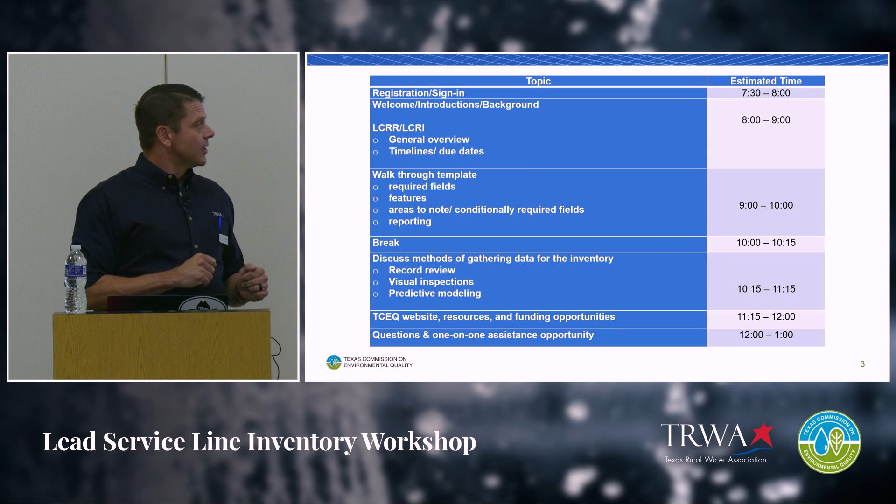Today this is the pretty loose agenda, but we should be going from about 8 to 12 o'clock. We're going to go over 4 sections: an overview of LCRR with a little bit of LCRI, the improvements. We're going to walk through the template, each section, to explain what is needed on each component or tab of that Excel sheet. We're going to go through the different methods of gathering this information, and then at the end, some resources and funding information. So we're going to break this up for different speakers.

Without any further hesitation, we'll have Elston Johnson go over the LCRR overview. Thank you, Jason. So I'm going to take some time to go through the actual overview of the rule requirements for the LCRR and mention a little bit of LCRI. We'll talk about that when we get to it. It hasn't been released yet.

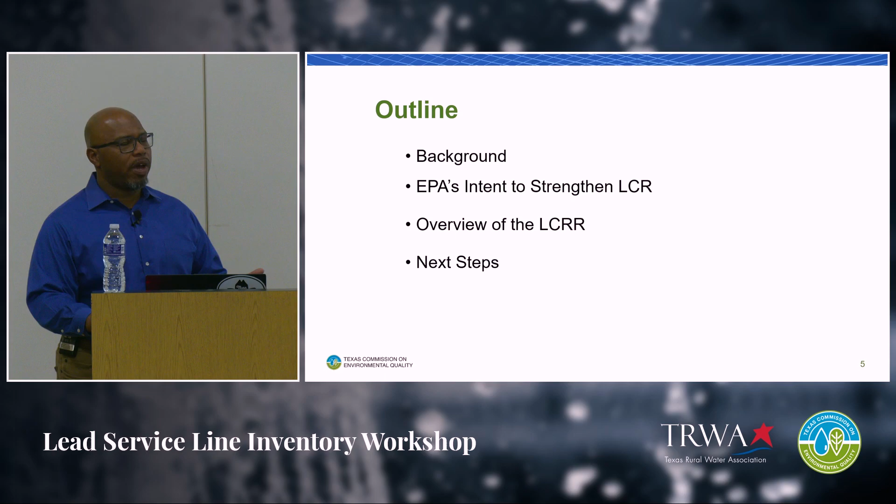What we want to do is give a little background about the lead and copper rule revisions, and then talk about EPA's intent to strengthen the current lead and copper rule, and then go through an overview and the next steps. Again, as Jason said, ask questions throughout. We want this to be very interactive. We want to make sure you get the information you need.

All right, so the lead and copper rule was originally published by EPA in 1991. And as we all know, health concerns with lead has been something that's been an issue for years. Human exposure to lead causes a number of health effects, most notably delayed development, mostly in infants and children, when it comes to mental capacity. There's also some health effects that can impact adults as well, things like cardiovascular impacts.

Because of the number of routes of exposure, I know a lot of people are familiar with exposure through paint as well as dust, but water has a significant exposure rate too, especially drinking water. Some studies put it at approximately 20% of lead exposure coming from drinking water in adults, and even higher for infants and younger children.

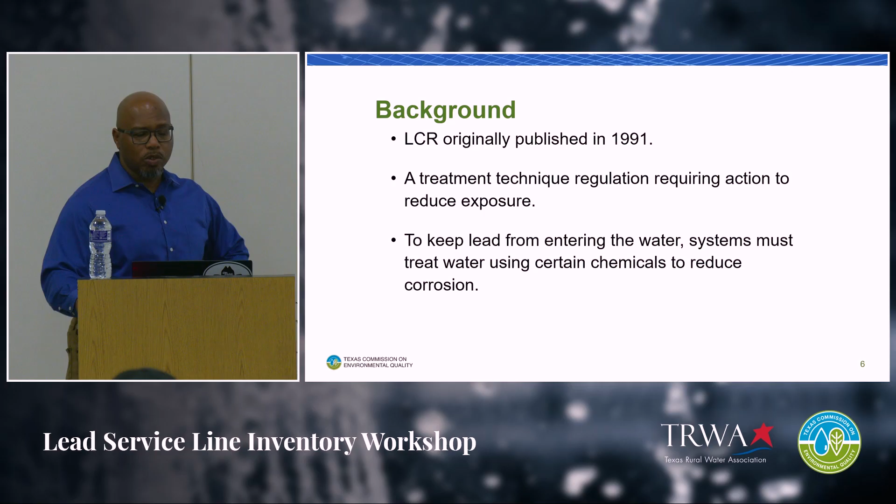So EPA put this rule out in 1991 to try to get those exposure rates down. It's a treatment technique-based regulation, which means once you hit a level, and the LCRR is an action level, there are activities you need to do to try to get that exposure down and get those lead levels down.

One of the most notable ways we do that currently, and still with the revision, is corrosion treatment—applying chemicals and treatment to slow down the rate of corrosion of lead out of pipes when it interacts with water.

To strengthen the LCR and the revisions, the goal is to proactively remove lead service lines and more equitably protect public health. In doing that, the Lead and Copper Rule Revisions are effective now.

They were put out in 2021. EPA is working on improvements, and those are currently under development. My understanding is it'll be released maybe summer or fall, with changes to make the current LCR even more protective. So we'll wait and see what comes up with those.

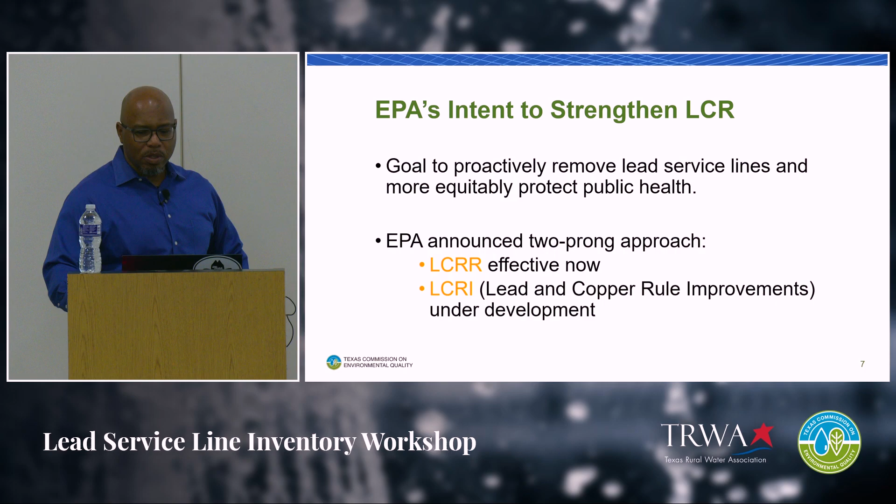So to strengthen the LCR, to better protect children and communities, there are three goals listed here for the rule.

Number one is to get the lead out and actively, effectively remove lead, which is the most effective way to address and prevent exposure to lead—literally getting rid of it. That's one of the goals here.

Second is to empower communities, providing more information and education on how to reduce their lead exposure. Then, better protect children—this adds a component of testing for lead specifically in schools, which hadn't been in place in the current rule, other than if the school itself was a water system.

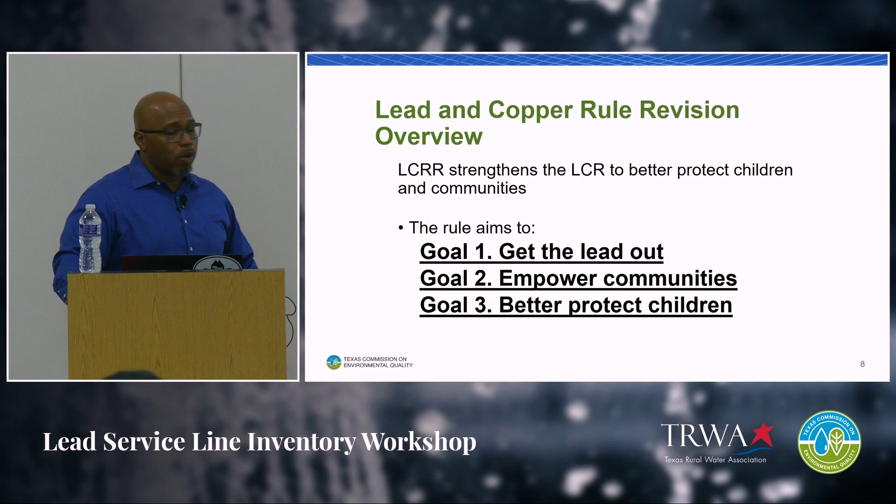So we'll walk through these goals here. Goal one: replacing more lead service lines.

The LCRR defines a lead service line as a portion of pipe made of lead which connects the water main to the building inlet—basically the line from the main to whatever structure is being served by the water system. It is typically owned by the water system on one side and the property owner on the other side, which makes things a little complicated, so we'll talk through that.

Also, galvanized service lines are considered lead service lines if they ever were or currently are downstream of a lead service line, or downstream of a service line of unknown material. So if you don't know what the service line is made of, you have to assume right off the bat that it could possibly be lead, and do more investigation.

We'll talk through that more as we walk through the inventory specifically. Now there's been a lot of discussion about the connectors—the goosenecks, the pigtails. They don't count as lead service lines in the final rule that was put out.

They are something to definitely pay attention to. As we walk through the inventory, you'll see that they need to be identified, and when they're found, they do need to be removed, but they do not count as a lead service line. Once they go through the specifics of the template and the inventory, they'll discuss that in more detail.

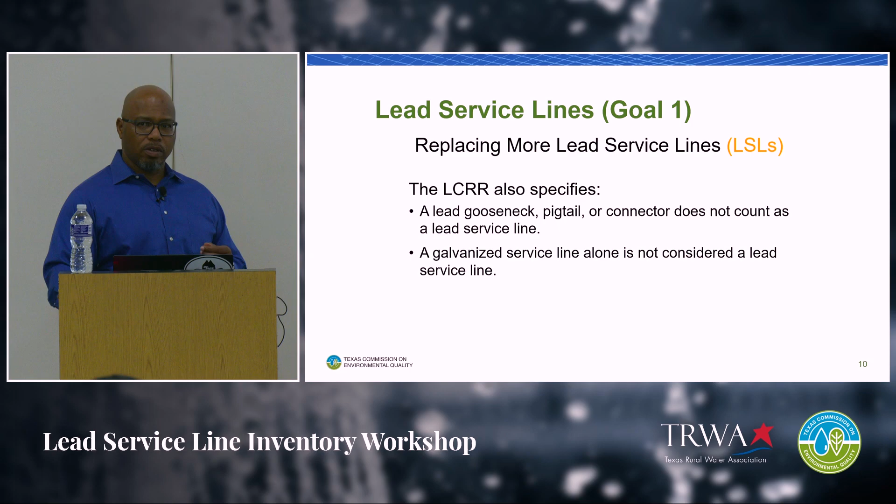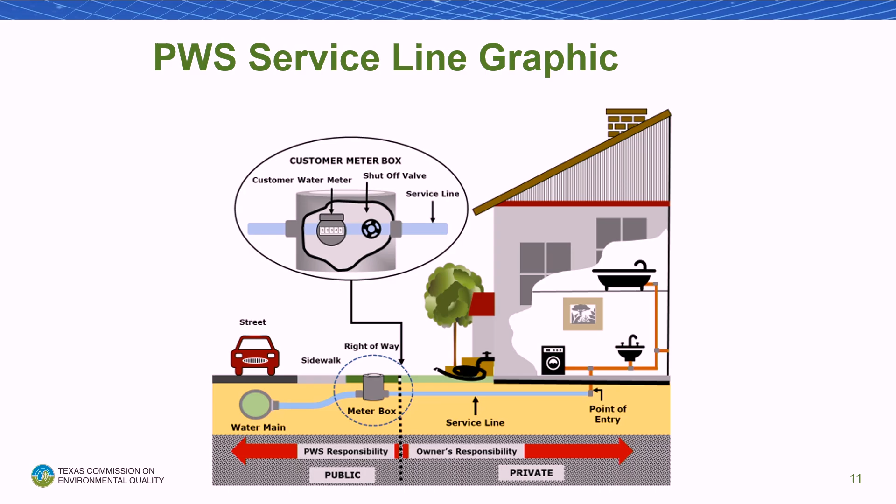Here's a graphic that describes a typical PWS service line. From the water main, you have up to the meter box, and then from the meter box at the property line, you go into the house—that's what's considered the service line. Below, it shows what's considered PWS responsibility, the public side, and the owner's responsibility, the private side. Again, when it comes to getting that replaced, that can make things a little complicated.

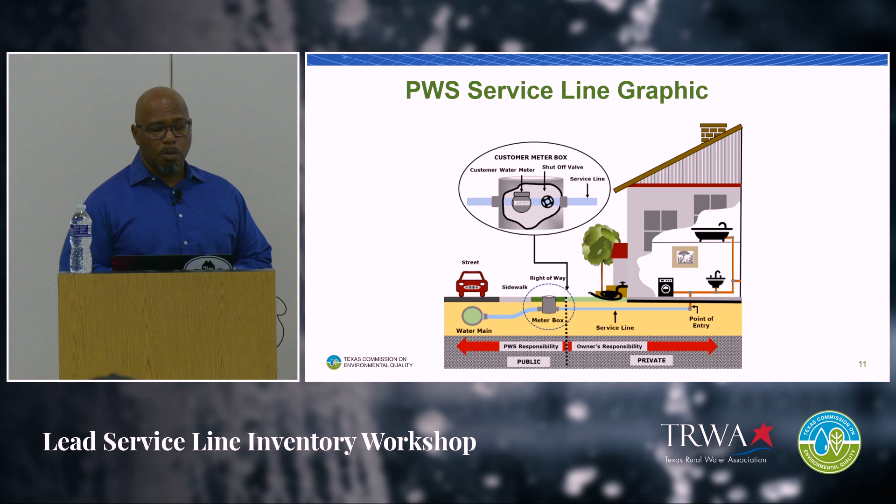Both parties have to work together to get that service line replaced when it is lead. So this graphic highlights when there's a gooseneck in place, or a connector from the corporation stop off the water main to the service line and into the house.

In this scenario, if that gooseneck is lead and the service line is PVC, then this is not considered a lead service line. So that's why the green check marks are there.

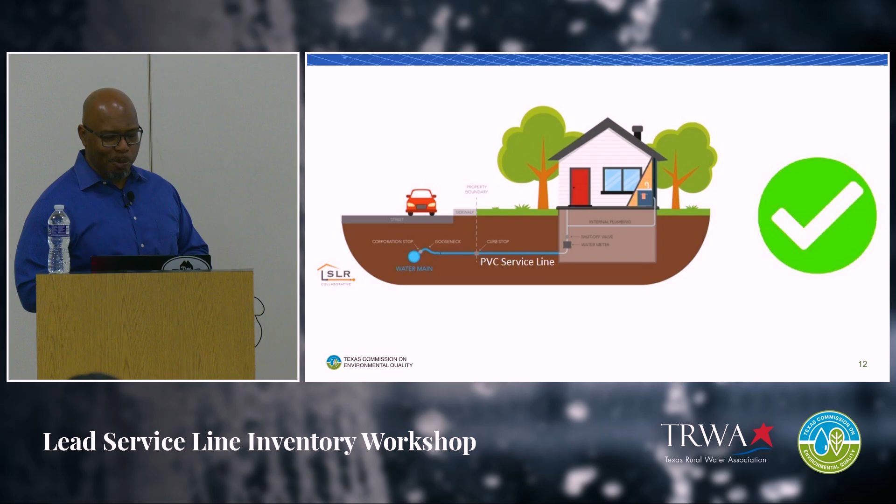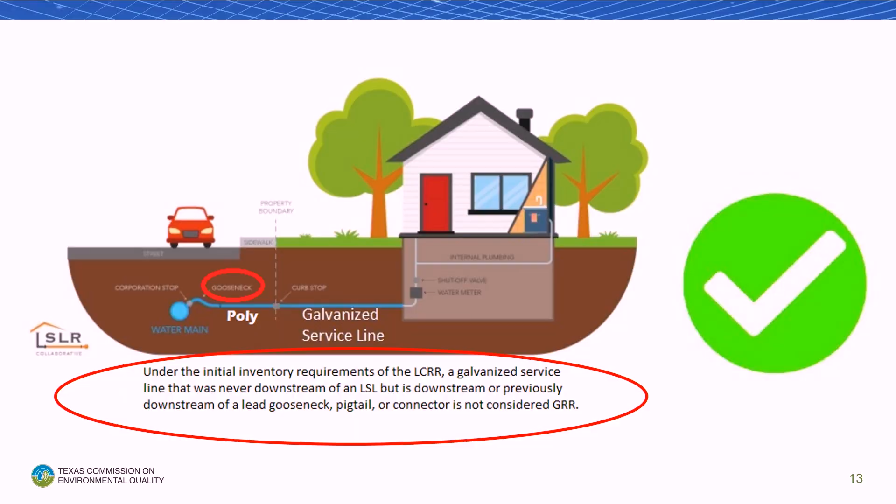Now in this scenario, it's showing that with the gooseneck connection, if it happens to be lead, that line is listed as being a poly line from the connector to the meter box, to the curb stop, and then from there it's a galvanized service line. And remember, we mentioned earlier that for a galvanized service line to be considered a lead service line that needs replacement, it needs to be downstream of a lead service line, not a gooseneck.

So we put this in there because there was a lot of talk about when the rule was being developed, and even after it initially came out, about how goosenecks, pigtails, and these lead connectors play into service lines and the replacement requirements. So in this scenario, this would not be considered a lead service line.

Does the pigtail have to be replaced because it's lead, or is that allowed to stay? My understanding, correct me if I'm wrong, is if you identify a gooseneck that's lead, you should replace it, the connector itself, but not the service line.

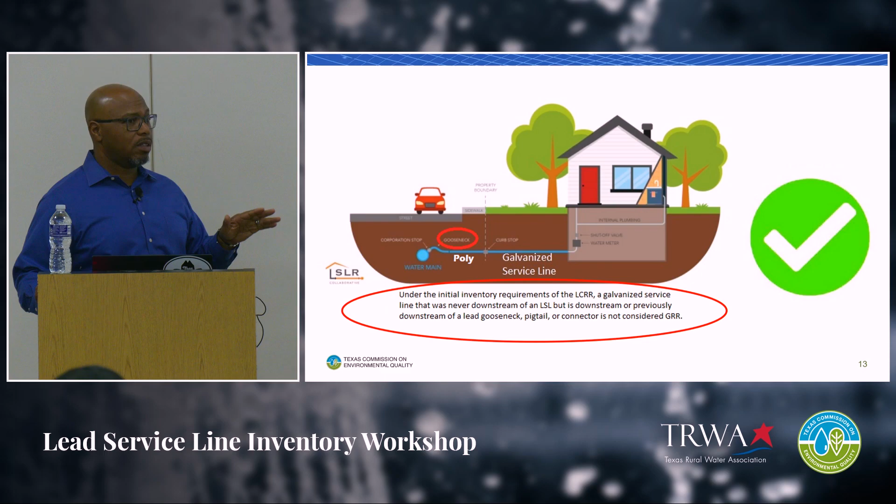Continuing on with goal 1, this is the federal rule citation of who needs to develop a lead service line inventory, and it's all water systems. All community water systems and non-transient, non-community water systems have to develop an inventory of their service lines. The idea is to identify those that are lead and need replacement. It also includes service lines regardless of ownership status.

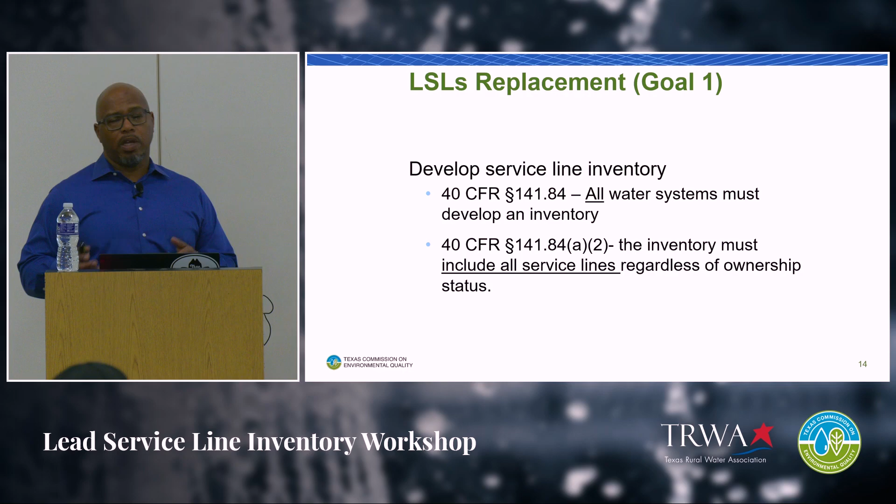As we saw in the graphic earlier, you have the public side and private side, the water system owned side and the homeowner owned side of the service line. Both need to be inventoried, and the template is set up to address that. All community and non-transient, non-community water systems are required to develop the service line inventory, and there's a due date.

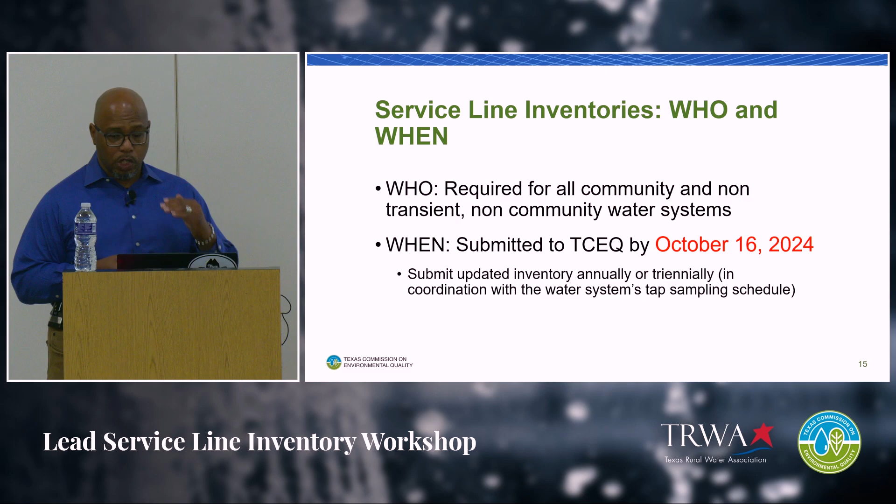Just in case you're not aware, October 16, 2024 — your initial lead service line inventory needs to be submitted by that date. After that, updates will be based on your current tap sampling schedule, either annual or triennial, which you'll coordinate with TCEQ. That's when your service line inventory needs to be updated after the initial one on October 16th, 2024.

So key to this is don't wait. As we go through today, there's a lot of information that needs to be evaluated for this initial inventory, a lot of records required to be reviewed. The sooner you start, the better — it'll give you the opportunity to do a really thorough review of your records, and if you need additional assistance, you'll have time to get it. So make sure you jump on this if you haven't already.

Continuing with goal 1, there are additional changes in the rule having to do with sampling. Under the current rule, you do your tap samples based on the tier system, based on structures and materials of service lines in your service area. The rule made some revisions to that — it's now more focused on tiers associated with identified lead service lines, so you make those your sample sites. This is the new tap sampling procedure.

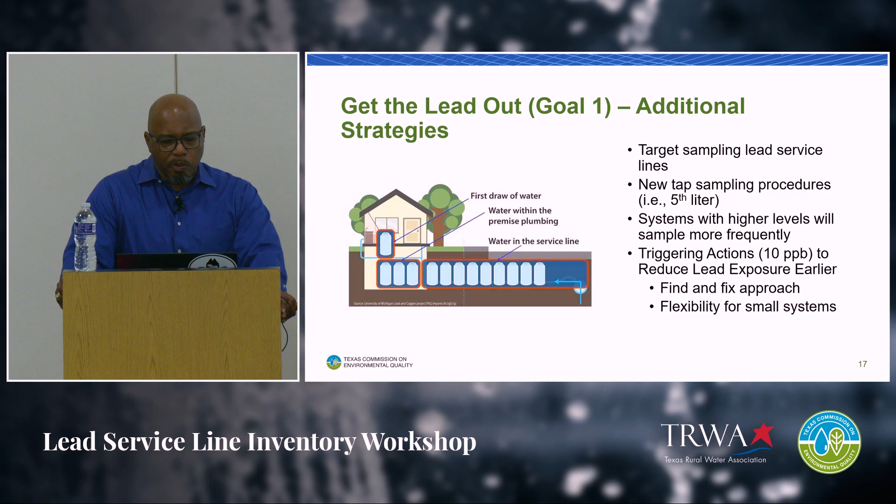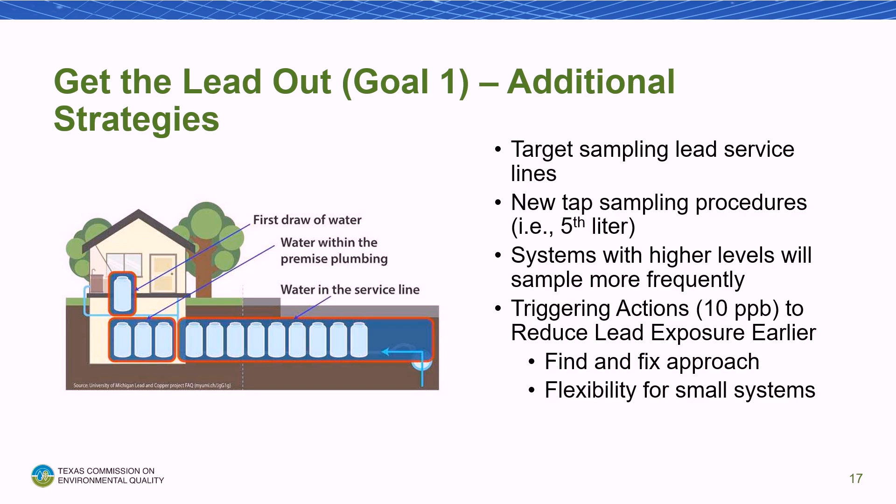So as the graphic shows here, instead of just doing the first draw, you now are doing the 5th liter draw. So the first draw of water is taken, and my understanding is that will be sampled for copper, and then you draw 4 more, and that 5th one will be sampled for lead. The idea behind that is to get what's representative in the service line, not necessarily the interior plumbing of the house, because we want to see if the service line itself is providing the source of lead.

Systems with higher levels will sample more frequently. So the tap sampling schedule will be adjusted if you have action level exceedances for lead. Just like in the current rule, you'll have to sample more if you have lead hits in your tap samples. What's different is that now there's a triggering action level exceedance. Before we had just the action level exceedance, but now there's a trigger to start doing some different assessments and other activities.

The current action level is still in fact 15 parts per billion, but this is now a trigger level at 10 parts, so 5 parts below, to start doing additional assessment activities if you hit that trigger when doing your tap samples. That's what you'll hear referred to as the find and fix approach. That's going and doing additional sampling as an example of assessing that site, that tap, to see if there's any way you can determine if there's lead from the service line or any other exposure point.

There is some flexibility for small systems if they do hit that trigger. There's the use of POU, point of use devices. There is opportunity for additional sampling. There are other things you can do if you're a smaller system, but the idea behind this is when you hit that trigger, you start addressing lead sooner at a lower level so hopefully you can find out and identify the actual source of lead, and then it can be removed.

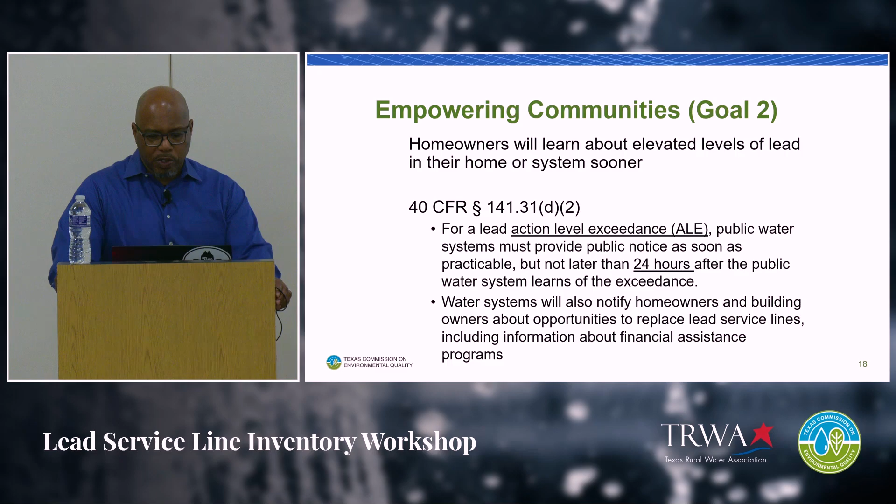Also, additional information needs to now go into your Consumer Confidence Report, or your CCR. The mandatory health effects language that's listed in the rule, and information on your lead service line replacement program, that needs to be in your CCR now.

If you have identified lead service lines in your inventory, those customers now need to be notified about those lead service lines on an annual basis. And if you have any inquiries about lead service lines once your inventory is made available to your customers, you have to respond to those information requests as well.

If you have a population over 50,000, your lead service line inventory must be available online to your customers. And then under 50,000, that's when you provide it when requested.

And then you have to deliver notice and public education material to your customers listed as having a lead service line. When you're doing any kind of lead service line replacement work, or any work that could disturb that lead service line, you must notify those customers right away and provide that additional public education about reducing their exposure to lead.

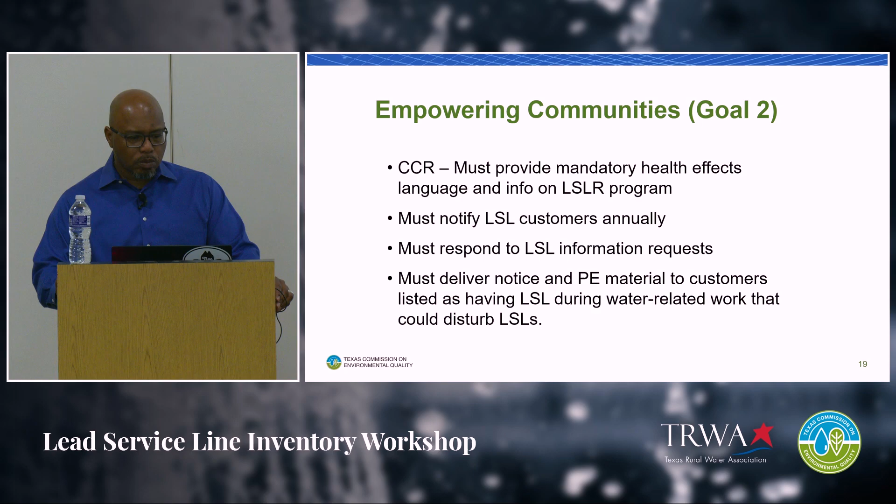All right, so goal 3, and this is better protect children. This is also something new with the LCRR: targeted sampling at schools and child care facilities. The idea behind it is that children are at the most risk of the health impacts of lead exposure. So we want to get more information by sampling and evaluating those taps at the places where they spend the most time, which is at schools and at child care facilities.

The LCR defines, as you can see here, child care facilities.

Those licensed by their state or local agency. Schools include not only public schools, but private schools, charter schools, elementary and secondary students. Elementary school is defined specifically up to 8th grade because the requirement is to sample at child care facilities and elementary schools.

This next slide talks about that. The idea is that your community water systems have to sample 20% of their licensed child care facilities as well as the elementary schools. That is going to the schools, helping them identify faucets where there's human consumption of water and where there's opportunity for exposure of the students to lead, water containing lead.

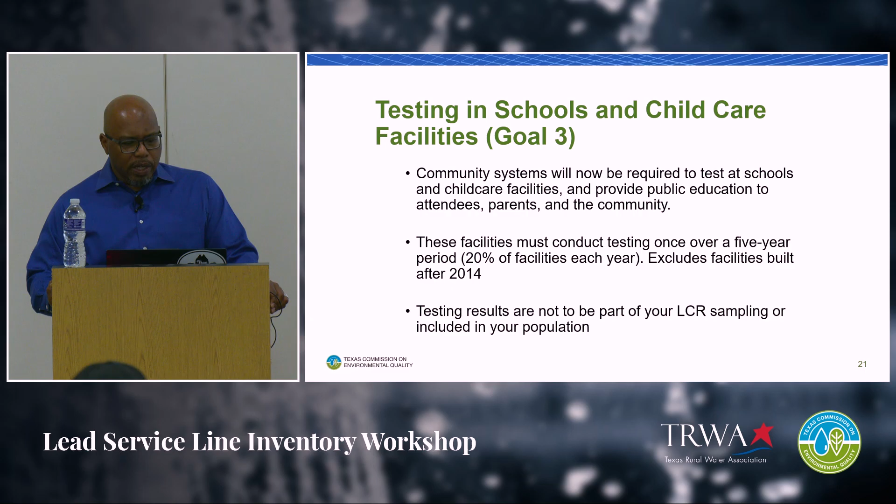So with that, there is currently an opportunity to utilize funds for your schools in your systems to do voluntary program testing right now. This program actually provides grant money and technical assistance to help your schools identify the areas they need to sample, put together a sampling plan, even a plan for replacement if necessary. They'll do the sampling, pay for the analysis, and provide technical assistance to get the sampling done.

You should direct your schools to this, because this is an opportunity to get a jump start on the testing requirement and have your schools get funding help as well as technical assistance. My understanding is a number of schools in the state have already taken advantage of this, and the program is continuing, so you might as well look into it—it'll help you get a jump on the requirement for testing your schools in your service area.

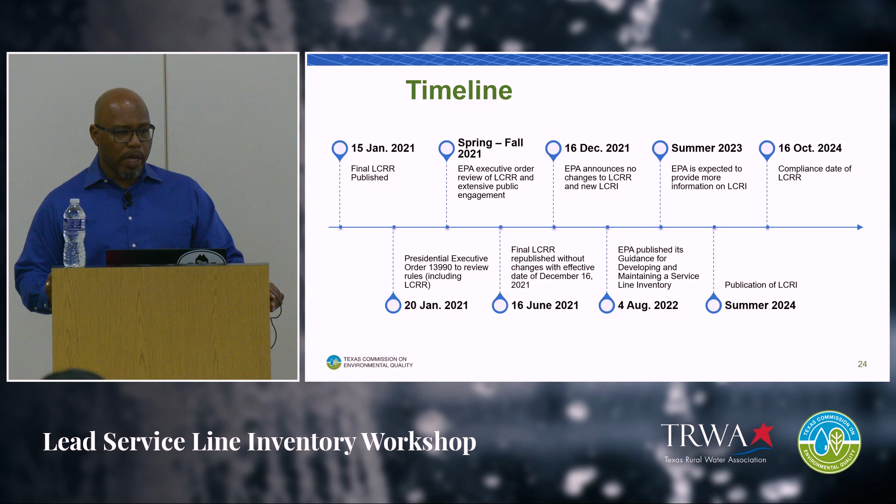So, what do we do now? As I mentioned earlier, continue to comply with your current LCR rules, read the revisions that are out there online, and EPA has put out guidance. You have the lead service line inventory guidance from EPA, and start working on the inventory. Be proactive as you can. Get ahead of getting the lead service line replacement done, getting a program in place. There's a lot of funding available, we're going to hear about that a little bit later today, so take advantage of all these things, and also continue with corrosion control, evaluate if you need to do corrosion control in your system. The whole idea behind this is to lessen the exposure to lead and ultimately replace and completely reduce that exposure to your customers.

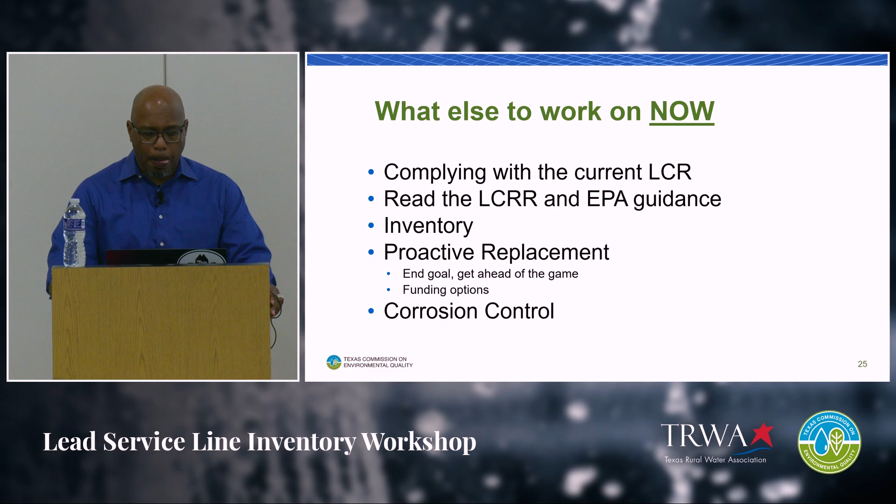So with that, are there any questions on the lead and copper rule revisions specifically?

Good morning, Nelson. Hector Alanis from Bluff Municipal Utility District here in Round Rock. Regarding CCR, the mandatory language, will there be some language that is mandated for that CCR, and when should it start?

Okay, so the question was, is there mandated language for the CCR, and will that be put out? I'm going to start, but I'll probably defer this question to make sure I get it right. The mandatory language is listed in the current rule, but I don't know if TCEQ is going to put out a template. Normally TCEQ puts out a template, and that language will be in that template for the CCR, so you can incorporate it into what you put together for your CCR.